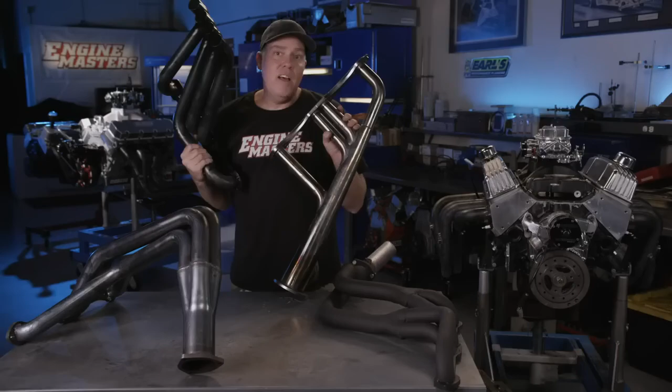This time on Engine Masters: how much power are you giving up to look this cool with your header?

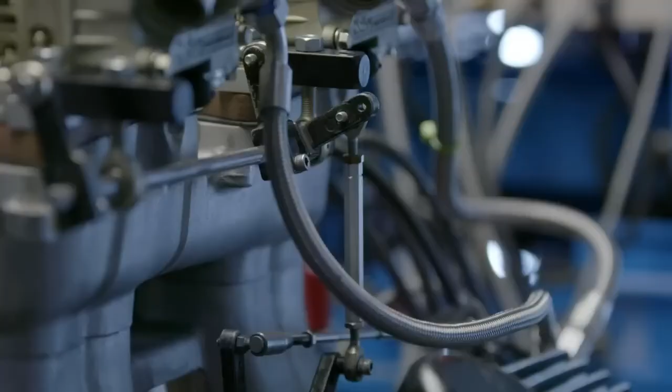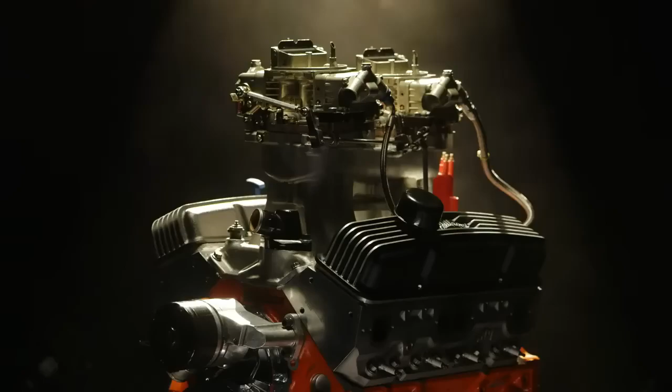At Engine Masters, we take horsepower very seriously. In many episodes, you'll find us chasing that nuance that gets the very last edge of performance. Other times, we test a bunch of goofy headers just because we can. That's what this episode is all about.

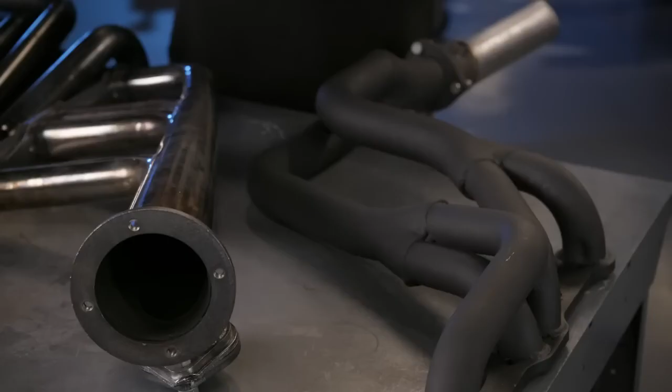Sometimes you choose an exhaust header for cosmetic purposes instead of for performance. On this episode, we're going to find out what you're actually paying in horsepower to get that kind of look. We've got Tri-Ys, Lakes pipes, zoomies, gasser headers, and T-bucket headers.

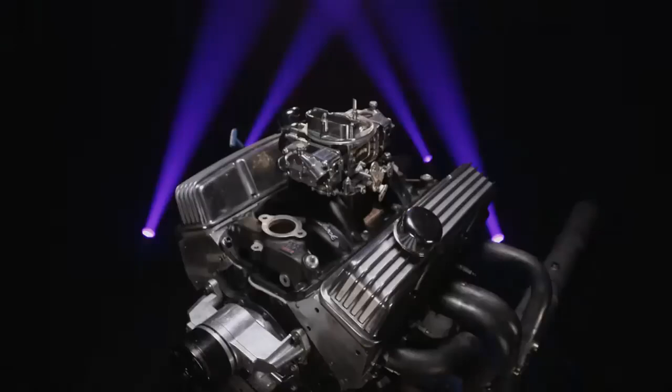But of course, the engine we're using as a baseline is our traditional 383 small block Chevy, because let's be honest, this is the engine configuration that's probably in most of the cars that are going to get headers like this. It's our regular old 383. You've seen us run it dozens of times. It makes about 450 horsepower.

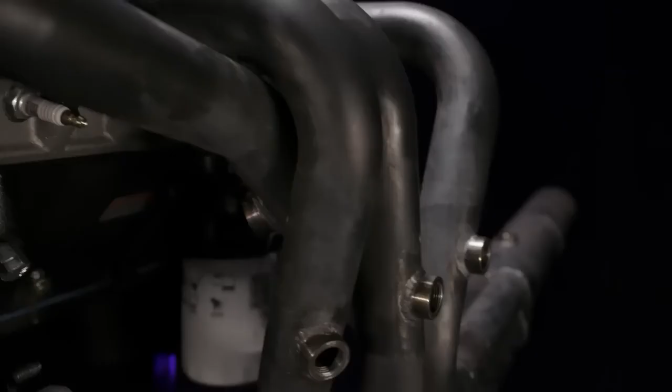So the headers we're going to test will begin with the T-bucket header. I call it the T-bucket header so you can visualize it as a goofy cosmetic header, but in truth this is what we call our dyno header. We've tested it, and this setup makes more power than a typical under-chassis header of the same size, which is why we always use it on the dyno. It's got that really long straight segment right out of the ports that tends to make horsepower. So that's going to be our baseline.

These are 1 3/4 inch tubes with a welded-on collector extension, and you'll see us using collector extensions on all the different headers. So that's the bogey to beat.

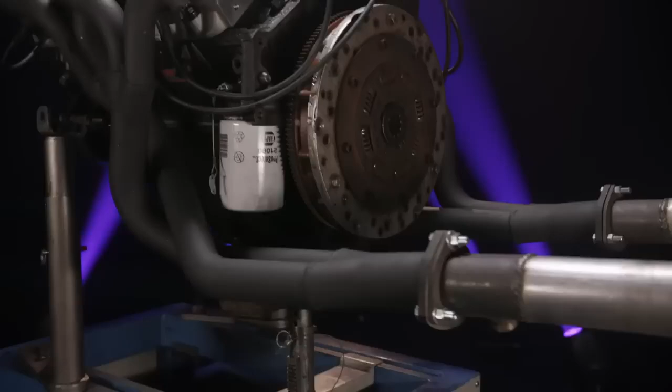Next up, we are going to try the Tri-Y. I wouldn't put this in the category of a cosmetic goofy header, but it's a design that's been around for a long, long time that many people want to understand, because there are so many claims that this design makes a ton of low-end torque. To be fair, they're typically used in applications like tow trucks and other things with much smaller, lower-powered engines than what we're dealing with here, but I still wanted to find out.

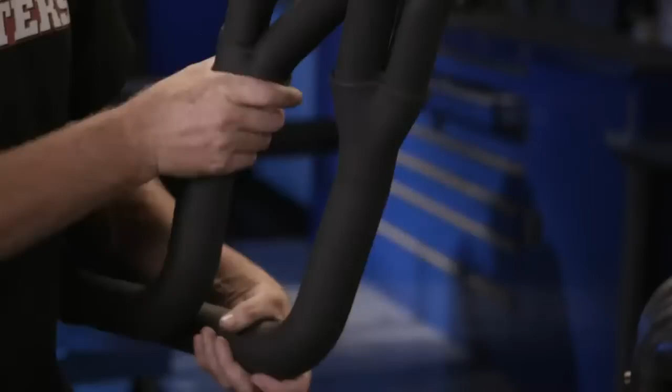These are automatically going to have a disadvantage because they have a 1 5/8 inch primary tube. However, you'll note why this is called a Tri-Y: it has a pair of cylinders coupled into one Y right here, then another pair of cylinders coupled into that Y right there. Then it goes into a 2-inch tube, and all four are coupled right here into the third Y—hence Tri-Y.

I have no idea what this is going to do. This is a Doug's header for an application like a GM G-body—let's call it a Monte Carlo or something like that. It also has the smallest collector of anything in our test, 2.5 inches, but we're going to run it with a little extension.

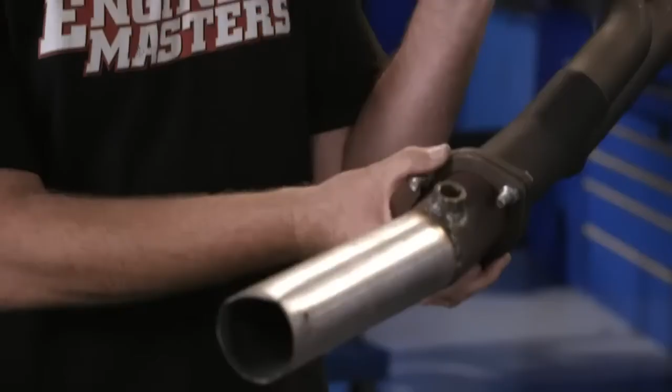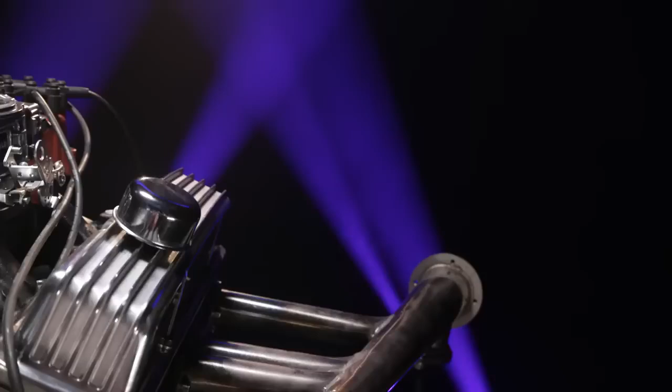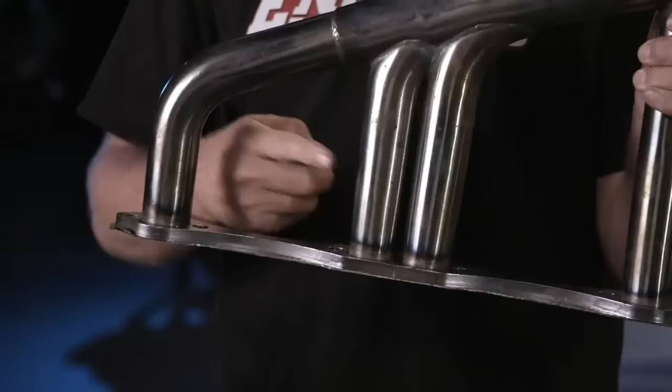In case you're wondering, we do have the bypass capped off right here because we didn't want the flow to be interrupted at the end and possibly hamper performance. So that's the Lakes header.

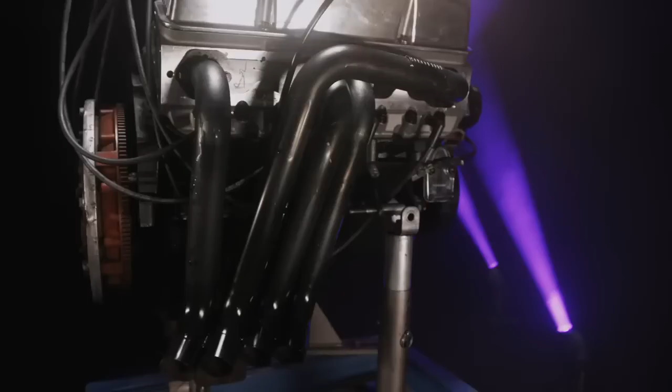Next up, the zoomie. Zoomie headers are really short headers with no collector whatsoever. You'll often see these on dragsters, with more of an up-sweep design or sometimes a low down-sweep design. These ones are from Schoenfeld Headers—they're dirt cheap and they're 1 3/4 inch tubes. It's going to be really interesting to find out what kind of power it makes with no collector whatsoever.

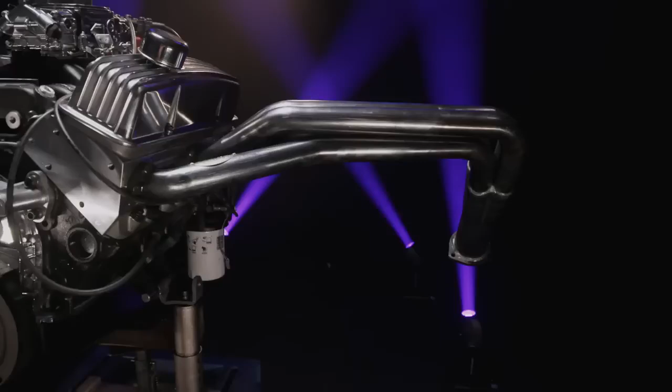And finally, the header of my personal choice: the fender well header. This is a unit for a Tri-Five Chevy, and it would be in what most people call a gasser style.

So you can see, you remove your inner fender well, bolt that to the engine, it goes up and out right behind the tire. I suspect this is pretty solid because it's got those really long straight tubes on it. And we're gonna end up testing this with and without a collector. And again, that's a 1 3/4 inch tube.

So there you go, the roundup of cosmetic headers, and we're gonna kick it all off with our 383 wearing the sprint car tubes. This one's just for fun, a bunch of goofy headers.

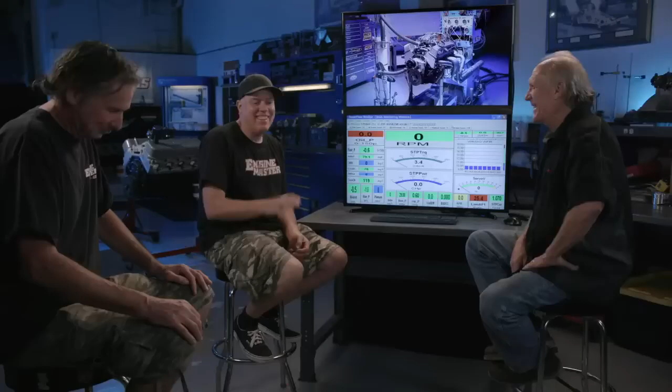Yeah, I don't think we're gonna learn much other than what happens when you install weird headers on your rat rod. So step one are the headers that we would normally call dyno headers, but in truth, those are like sprint car or maybe T-bucket headers.

Yeah, that's actually the way they're described. Well, I'm convinced this is going to be our best header, so it's probably the appropriate baseline. I hope it's not. Really? Yeah, but I think it probably will be. You're in for a surprise? I already know what you're rooting for. Fender well, Dave. Exactly. Okay Steve, give us a baseline. Okay, here we go.

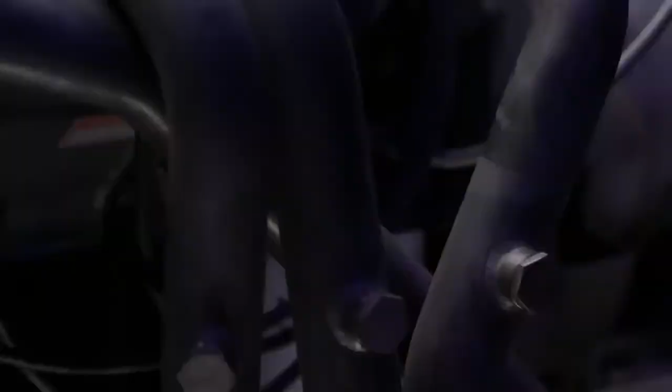So this is gonna be our baseline with our dyno headers, which are also like T-bucket headers.

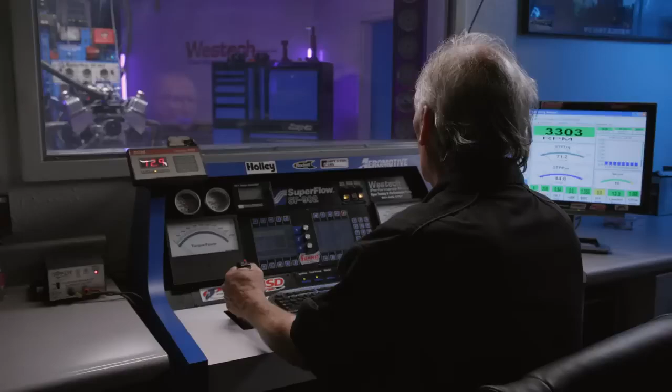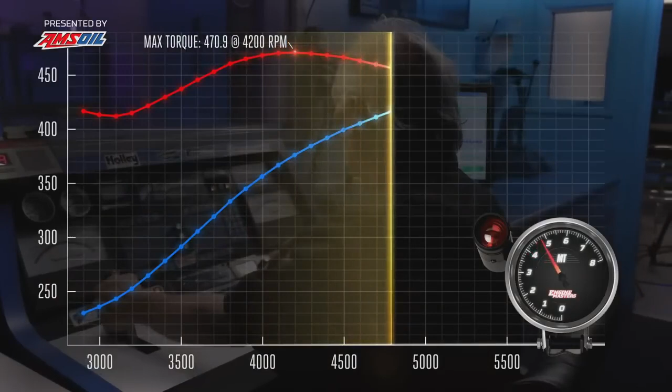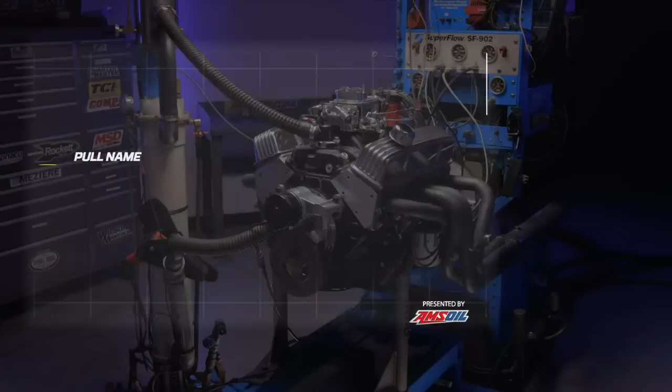Okay, let's have a look. Here's our baseline power, not a big surprise considering that the last time we ran this, it had a single plane intake manifold and it was making 470. The dual plane hacked it down a little bit. It's making 451.4 horsepower at 5,900 RPM, and the torque is 470.9 at 4,200 RPM. It is what it is.

The only question is which header do you want to run first? Do you want to go from presumed worst to presumed best? I want to get the tri-Y's out of the way, because those are the presumed worst. They just irritate me. Okay, tri-Y headers coming up. That was a good answer.

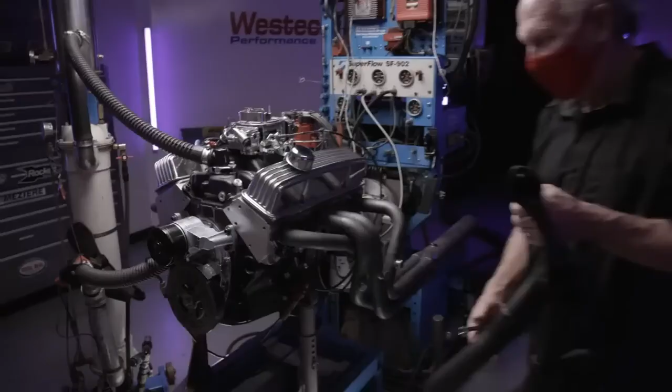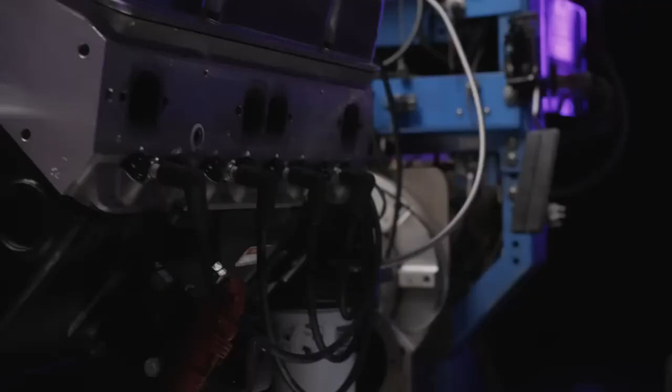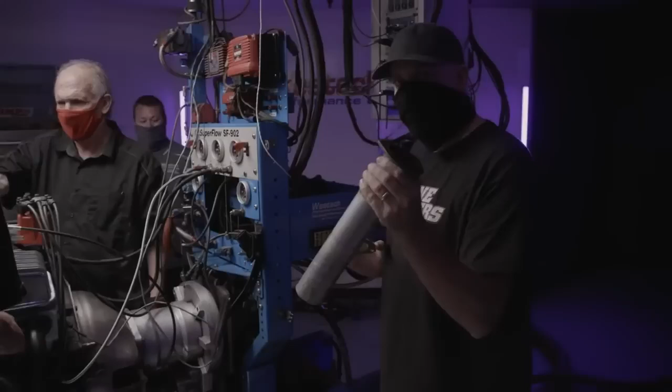Oh, that was noisy. Okay, take her away, Troy. Look what I found, here's a shocker. I found some 2.5-inch tube collector extensions here at Westech. There'd be no reason to actually run this in real life, but I'm gonna throw them on here just to give these headers some chance of making a ton of low-end torque, because as we found out in a prior test, collector extensions make a huge difference in low end.

Okay, let's go. This is gonna be great.

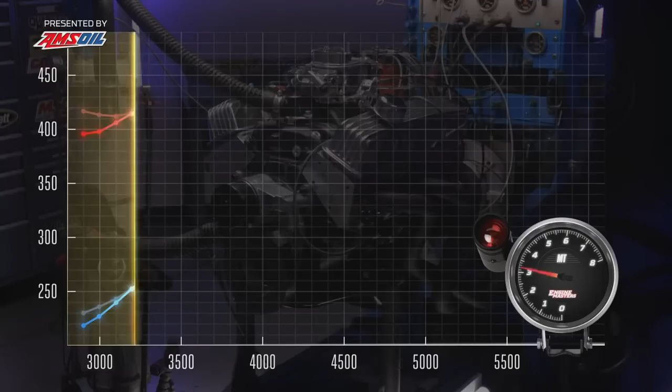Are you still irritated by them? Yeah, a little bit. Okay, well let's have a look. You're gonna be more irritated when you see the numbers. I think so, Steve-O. Not that bad - 467.5 pound-feet of torque, 445.3 horsepower, so the peaks are surprising me a little bit.

But let's look at the curve compared with the dyno header. Best possible header versus tri-Y. Here it goes.

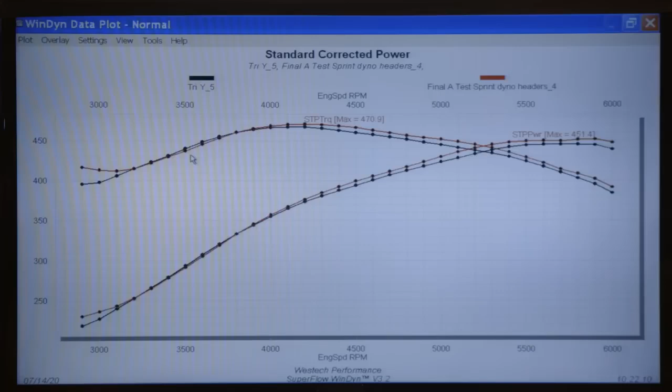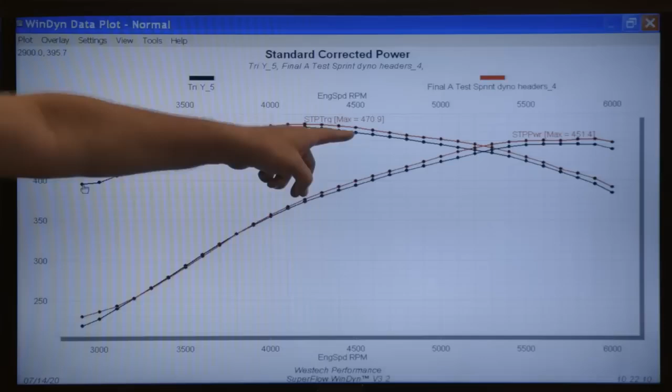So the black lines are the tri-Ys, down as you would expect, and the red is the dyno header. You saw a little bit of a dip right there, which is interesting because the tri-Y is supposed to be famous for making power right there, and it does not. I'm surprised that it matches throughout here, and I'm surprised the peaks - how much are they down? 5 or 6 numbers.

Dyno headers are definitely better, but by nowhere near the margin I expected. No, they aren't as bad as I thought. I can't be as irritated by the tri-Y as I wanted to be. I know, and I'm disappointed that I can't be either. How about you, what's your irritation level?

Oh, zero, I kind of like it, actually. Really? Oh, look at that, it's right there with the dyno header. So you don't care whatsoever, you've got a little bit of a rash. Admittedly, that's pretty decent if you can hang with the dyno header that close. Not bad, so what do you want to do next?

We should do yours next. Yeah. No. Yes. No, we're gonna end with those. No. Well, you're outvoted really. Right, yeah you know, you're right. But you know, you and I both know that this is not a democracy, so I might as well just go put the ZOOMIES on. No, I was thinking lakes pipes. Oh, I forgot about those. Yeah, those are awesome. Right, it all comes back to the front. All right, let's go get the lakes pipes and throw them on here. Make the tri-Ys look great.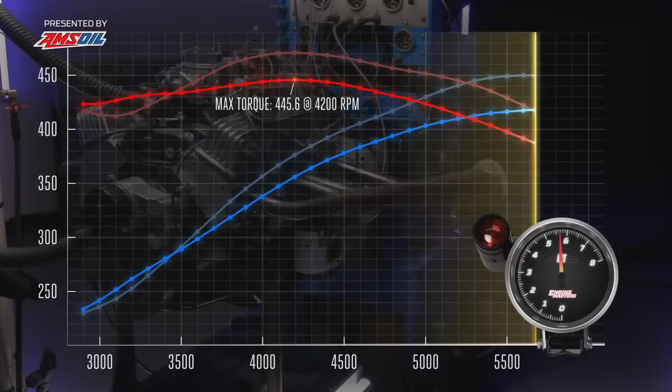Okay, it was terrible, but do you care? No, it's just so cool looking. I don't care, it doesn't matter, it's a decorative item. It made 445.6 pound-feet of torque, 425.8 horsepower, way down.

Let's see how bad it really is if we compare it to the dyno headers, which are like the greatest. Oof, that is terrible. Clearly the black line is the Lakester header, red line is the dyno header.

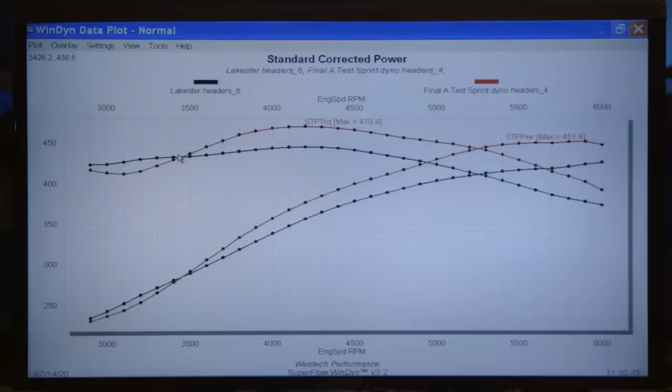This is kind of interesting, but it's good for drivability. Yeah, it made more torque below 3,500 RPM. That's kind of a surprise.

But did you hear at the top? Oh, it labored hard trying to rev up to the red line. Yeah, it's like it really didn't want to run, it was like, ugh. And I think that's because of the way the three pipes enter.

They're not dead 90s, but remember we learned on the single exhaust how bad it hurts flow when you just 90 the pipe like that? Yeah, that's almost 90, particularly the ones right in the center there. Yeah, that's just gonna kill it.

I think they're just cool, that's all. But the Zoomies are cooler? Absolutely. Okay, we're going to the Zoomies next.

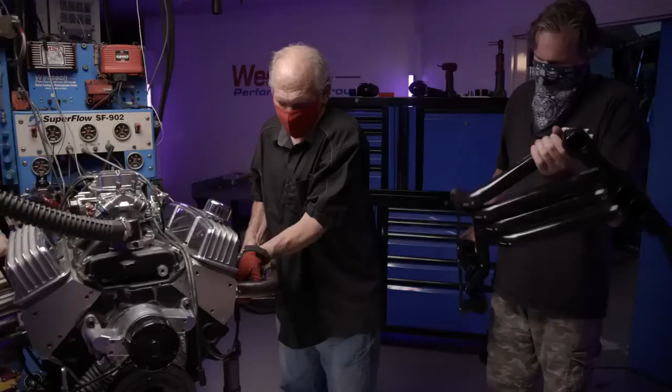Steve-O, are you ready for the raciest looking headers we've got? Those are my favorites, the Zoomies. These are gonna sound terrible, they'll kill power, but they'll look the coolest. We need a header gasket.

Right, we're firing up the Zoomies to burn the paint off of them and hopefully shoot fire.

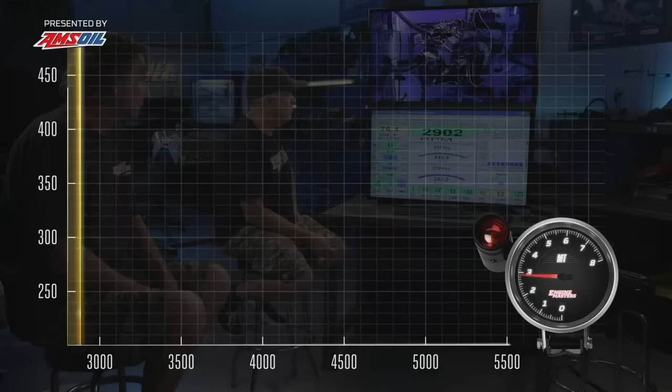First of all, the important stuff, I think the Zoomies win for fire. Yeah, absolutely. The Lakes pipes were pretty good, but nothing like this. Yeah, and some style points too, you have to admit, right? Yeah, no, that definitely got like rat rod style points. I was thinking a lot like a funny car driver.

There we go, 457.8 pound-feet and 440.7 horsepower, and I'm surprised how nice the curve looks. Really nice, that's kind of a shocker. It was pretty good way down at the bottom at 3,000. Surprising, still pretty good. Yeah, for being so short.

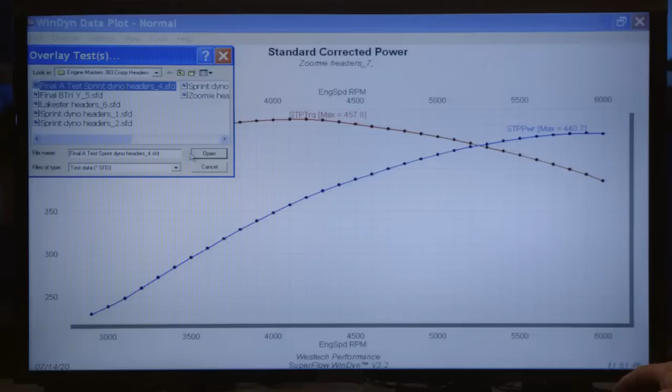Here we go, compare it to the dyno header. Black lines are the Zoomies, red lines are the excellent dyno header, and I'm surprised at this, that something with no collector at all made more low-end torque. Yeah, I'm kind of shocked. That's confusing. Yeah, that goes to show you never can predict the results sometimes.

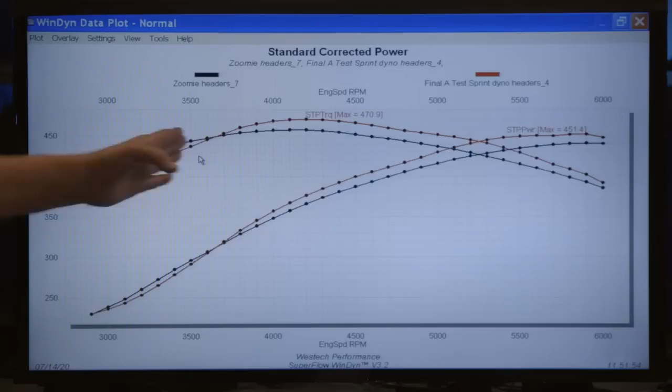Never say always is what that means, yeah. I would have said they'll kill low end and make the same peak but be down throughout the curve. That's what I would have guessed before we started, but obviously it killed power everywhere except below 3,500 RPM. Who knows? The bizarro world of this.

It still wins header for cool, though. No, the coolest is what we're gonna do next, which is the fender well for the gassers. Oh no, which are gonna make the most power and look cool doing it. Or humiliate me. Well, we'll find out in a couple minutes.

All right, you wanna cool this down and I'll go grab the Doug's gasser header.

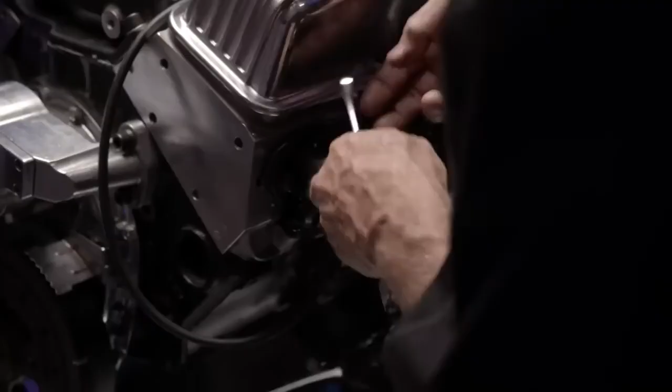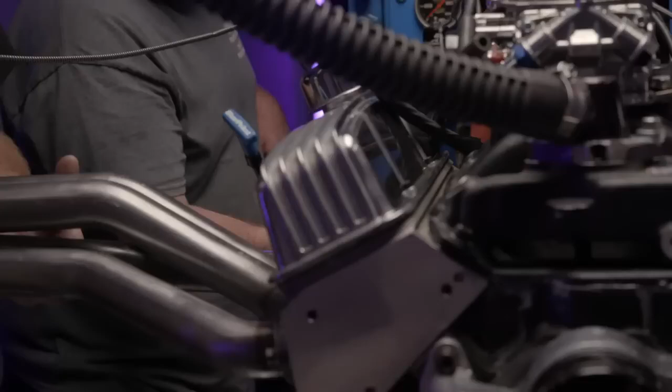David always has the most fun on an episode when he gets to pick the winning part first. How do you know it wins? Well, because you picked it. Once again, you can never say always. Yeah, that's a dangerous statement. It's a lesson I often forget. Yeah, it's a dangerous statement in engine technology.

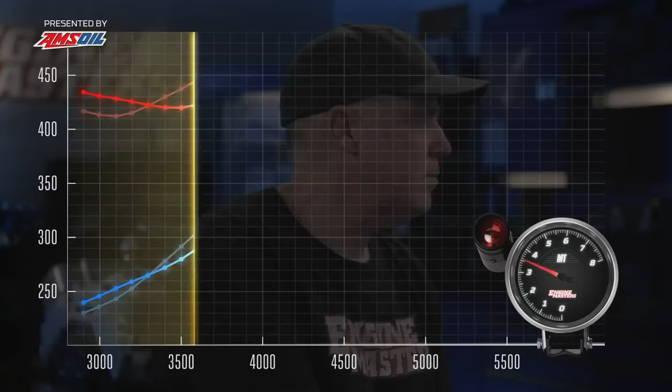The numbers, please, Mr. Brule. Yeah, looked good, especially coming on the roll in. It looked really good. We'll do it. I like watching you do this.

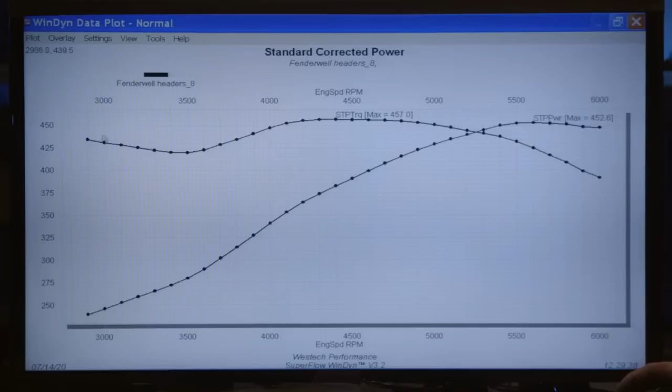457 pound-feet of torque, 452.6 horsepower. The zoomies had a nicer looking curve. Yeah, they had none of this. I didn't even see this. I saw this number when I rolled in, that kind of drove past, then I saw this one.

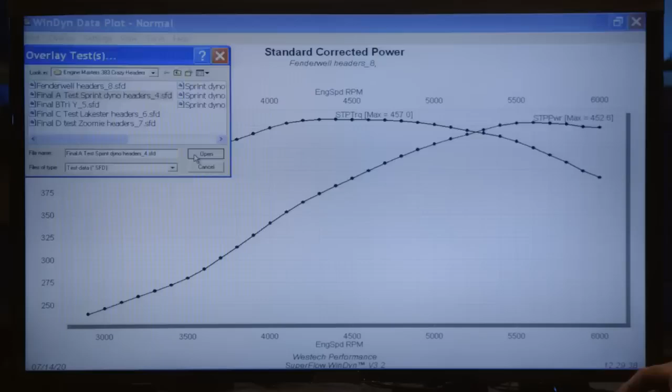I obviously saw that, but how about overlay it on the dyno headers? It's always the answer. Dyno headers in red and my fender well units in black. Boy, did they throw away a lot of power, but they made the same from about 4,700 up. We're a little bit right at the bottom, they were better, but torque-wise, just destroyed.

I know how to fix this. Maybe, maybe, I know where you're going with it, with the extensions, but what I'm more interested than anything is when the extensions are on it, is it going to actually lower this and pick this up? Is it in this area right there, is it going to do something? I think he's pretending to know.

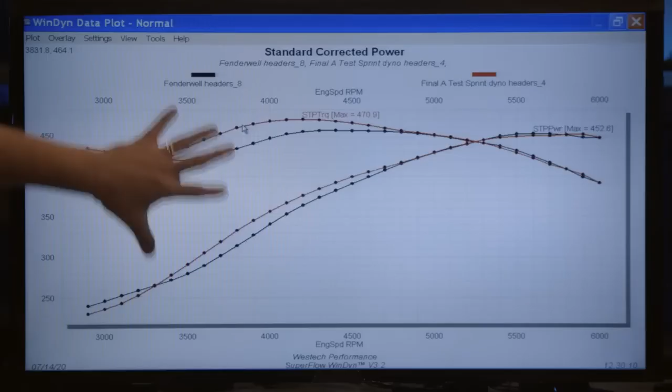Bad move. We should go put extensions on and see what happens. I think it's a good idea. What we're gonna do next is put header collector extensions on there, which is gonna do something down here. We just don't know what.

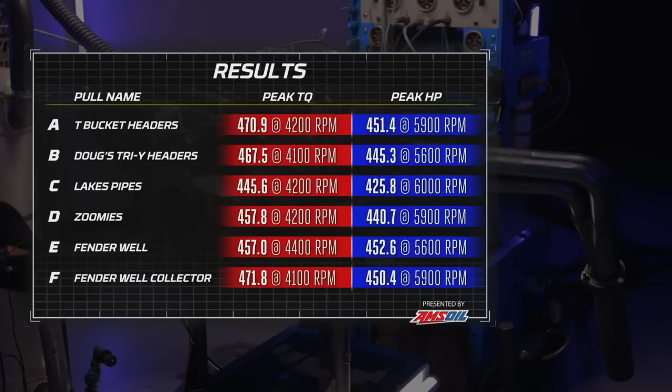Collector extension makes this thing a beast. Quite a difference, look at that. 471.8 pound-feet of torque, 450.4 horsepower, and let's have a look at it without the collector extensions with the same header. Wow, that is just nothing more than bolting on an 18-inch tube on the end of the header. The red line is without the collector extensions, black is with, and look, once again, it's doing something weird down here. It did exactly what I had hoped it would do, was lose some.

Yeah, and it's that whole thing. It's crazy, I mean, we found this out when we did the whole episode about collector extensions. But man, that is a lot of meat right there. That makes the car go faster or do better burnouts anyway. It makes it do a lot of stuff better. Wow, that's great, and picked up the peak torque number, a big number too.

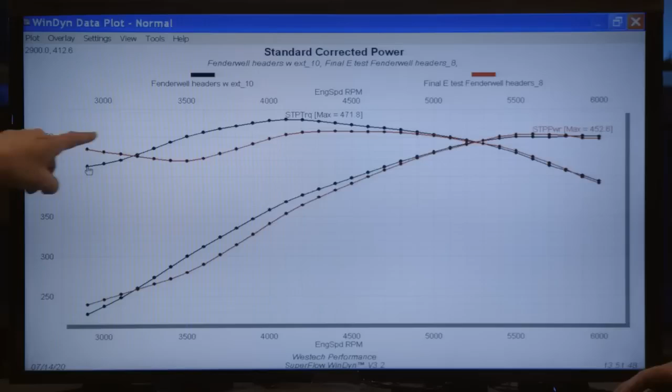This is huge, that's going to be the thing that everyone looks at. This is the most interesting to me, a collector extension that lost power below 3,200. I think we need to go cut it shorter. Why? We've done that episode. It made sense though, it worked. But where do you end up with it?

I know, it ends up someplace in between, but this is what I was kind of thinking, that it adds it up here back. But you don't know, we're talking 2 horsepower. That could be. Just flip-flop those completely, swap it, which made the curve kind of more similar to our dyno headers. Yeah, in fact, I bet when we look at that, we need to look at that.

Okay, so pull off the one without the collector extensions. Right now we're gonna compare the fender well header with collector extensions to our dyno headers, or what we've been calling T-bucket or sprint car headers. There you go, the fender well headers make more torque than Steve's favorite dyno headers. Actually, look at that, got a better average over the curve.

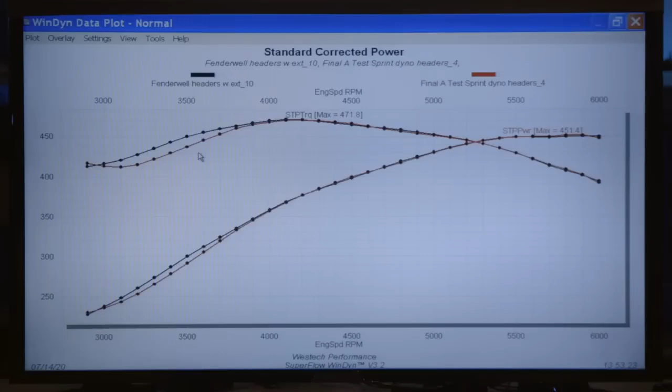Yes, it's almost identical. Actually, I think I have new dyno headers, these are them. I know, except that they're horrible to work around. Oh, they are, because they burn you right in the giblets, but aside from that, you can't get to anything, but they really are good on power.

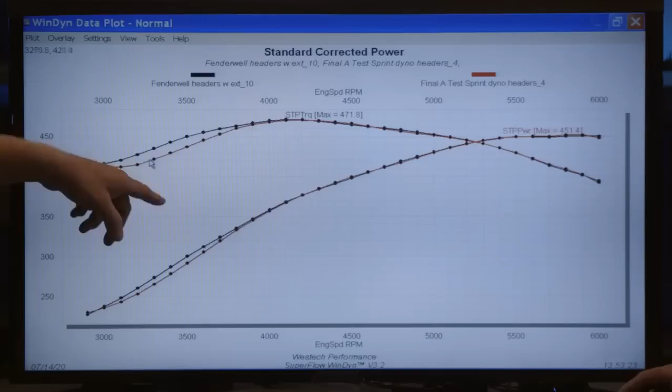Man, look at that, wow, that is awesome. Black lines are my fender well headers, and the red is our world's greatest dyno header that we use every single time. And they absolutely match above 4,000 RPM, and from 3,000 to 4,000 the fender wells make more power, and then there's still a weird little wobble right here where if we pulled it even lower.

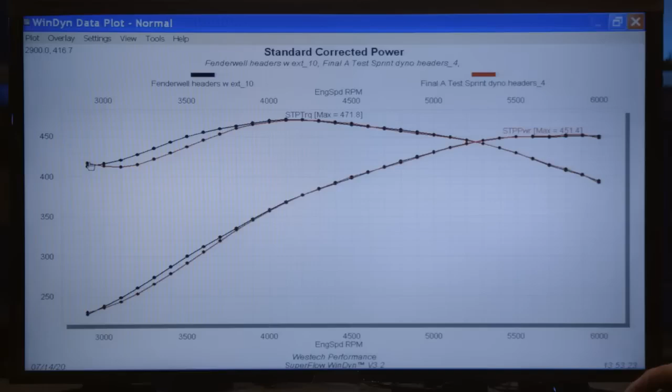So that's the entry, insignificant number there on the dyno, yeah, also so you don't even know. I really didn't think what I saw was going to be this much better than the dyno header, because this number looked pretty similar, the peak number looked pretty similar over there, and it was almost identical up here.

So I thought it was going to be kind of an overlay, but boy, there's a chunk of meat there. What I want to know now is on these fender well headers, the collector extension always needs to turn and go back down below the tire.

I wonder how much just that turn makes a difference. What I do know, though, is it's worth having it on there even with the turn, so it doesn't blow everything up. You couldn't put it on the car like this, the collector extension would almost be dragging the ground. Yeah, right, so you gotta get it level with the rocker panel.

I don't think having that turn is going to make any difference, or if it does, it's not as bad as no collector extension at all. I agree with Steve. I don't see it making a lot of difference if it's a nice transition with that same length. That's impressive, that's a good header. Can we overlay every header that we've tested here just for grins?

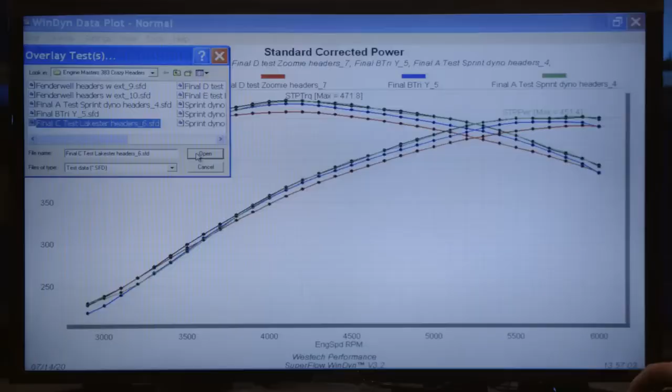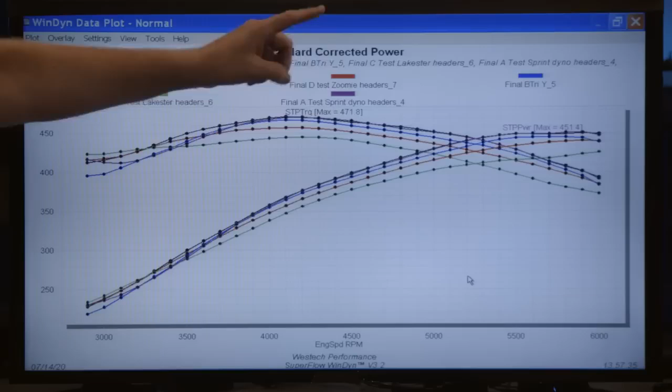Now we've got a graph here that's sort of confusing to look at. It's got every header that we have tested here. Let me go through the colors for you. Black is going to be our best ones, the fender well headers with the extensions on it. Then we've got red for the ZOOMIES, blue for the Tri-Y, green for the lake type header, and magenta for our standard baseline dyno header.

Guys, thoughts? The only thing I see is, with the exception of the Tri-Y, every other header that makes more down low makes less up top. And conversely, the ones that make the most up top make the least down low. Look at what else we saw here, which is that the Tri-Y, advertised forever as making tons of low-end torque, did not. It's the worst. And the ZOOMIE with the shortest tubes and no collector, which is not supposed to make any low-end torque, did.

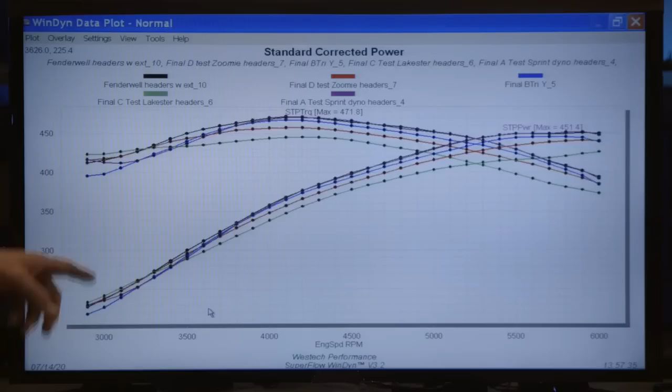You know, I think it's fair to say too, if we put a camshaft in here with another 20 degrees duration and a wider exhaust spread, different lobe separation angle, it all changes. We could see different results. So specific. My takeaway is there's power on the table, obviously, from the spread of the various curves, but these are just funky headers that you pick for a particular purpose. It depends on what you want for your own car or whatever you're trying to do. You're not going to interchange them as equivalent kinds of parts, right?

No, I was just curious. They're all novelty headers. None of these are ones that you're going, ooh, I'm going to race, how can I fine tune this with my lake pipe. Nobody's doing that. These are all just for decoration, with the exception of the victorious and dominant fender well header.

Oh yeah, if you had a Tri-5. He's completely discounting the sprint headers, just like they don't exist. They're junk, do you see how much power they threw away? Yeah, that torque, Steve-O, how can you excuse that? Okay, you win. But on a bigger engine with more power, they might make that torque, but they're not going to make the top end. So I guess what we're saying is the results will vary.

But in general, you can get the idea here. I think the Lakes pipes, if you took them versus a chassis header in virtually any application, they're going to kill power. Yeah, and I think the same is true with the ZOOMIES. You know what's fair though? Sometimes it's not about power, sometimes it's just about being cool. And the Lake pipes and the ZOOMIES are cool.